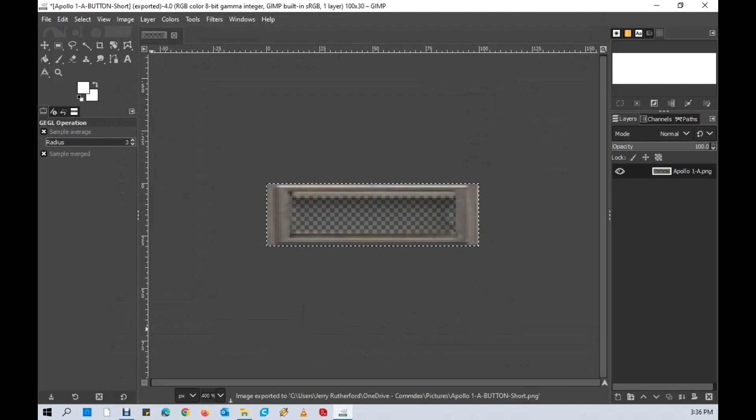So now I've opened up another program called Inkscape, another free program, very useful. Here's the button frame that I made, and here's a color approximation of what it looks like when it was turned off. So I take this and put it in this button like this.

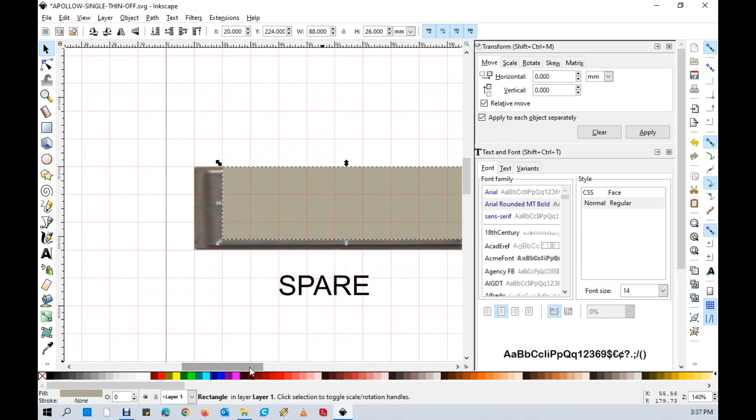I'll take this, and then use the align and distribute function, and tell it to center them both. Then I'm going to tell it to put this all the way in the back. Now we have a cool looking button.

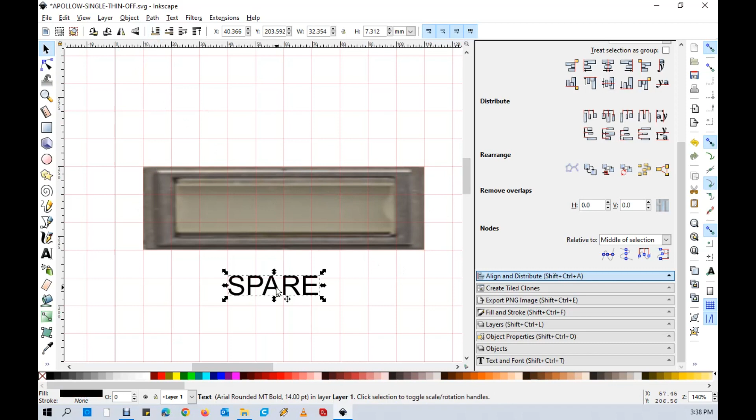Then I'm going to take this text and put it like this, and again use this alignment to center it. So now I've got a button, and that looks good, and I can save that button.

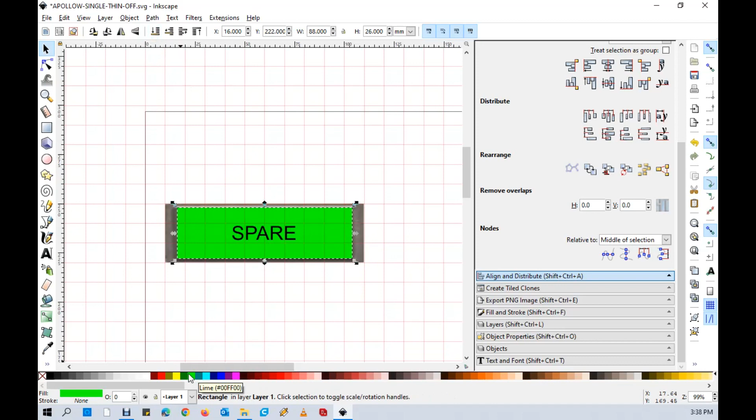One of the other things I can do is go back to this and assign it a different color, then throw it in the back. You can see I can make the buttons different colors. I'm going to do that for a bunch, and when I get done, I end up with a bunch of cool buttons like this.

What do we do with those, and what do those have to do with a CNC machine? Well, let me show you.

So let's go through the process of starting up the machine. First, we reset the e-stop switch to tell it it's safe to turn the machine on. Then we hit the activate or power switch to activate the Axis software so it's ready to run.

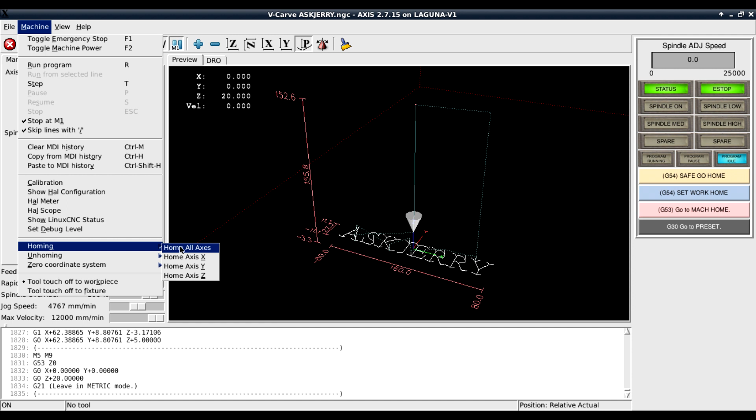Homing the machine is very important. This is where it travels to all of its different sensors, locates them, and knows its position. Then it marks that position as the zero point and references everything from there. It's very important.

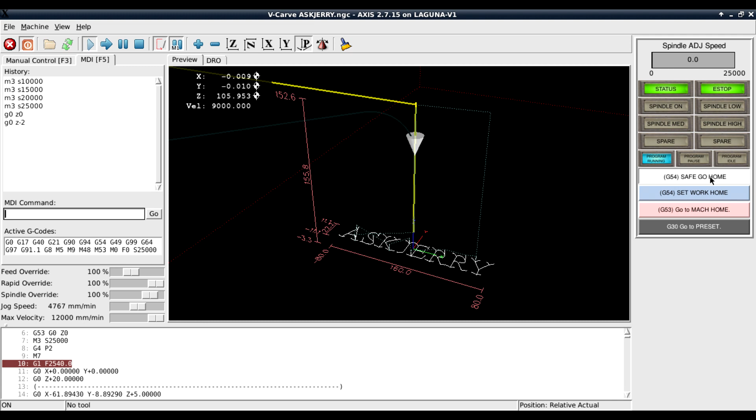The machine goes through a series of movements, and when it's finished, it knows where the 0 point is. From there, we can set our working position to be anywhere we need it to be. We define a new home point, and then at any time we can click the Safe Go Home button, and it'll automatically move the cutter as high as it'll go and then move over to that location.

You can see here that the tool is sitting in the middle right at the surface of the material, ready to start cutting. So now there's nothing left to do except hit the play button with the cycle start button, and the machine will start processing our job.

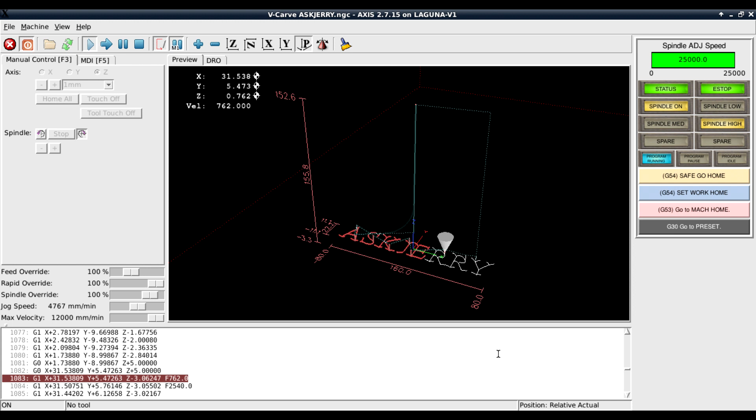There's a lot of action going on here. You see that the spindle is now turned on, running at the high speed of 25,000 RPM. And you can also see that it's halfway finished with the job. And then here it is, ended at the end of the job, shut down and ready for the next job. So let's see it in the real world.

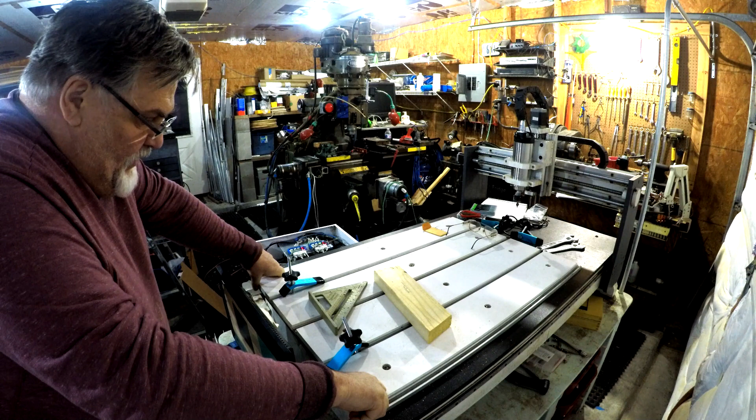Well, you reach a time when you've done as much testing as you can do, and it's time to give it a try and see what's going to happen.

So I got a little piece of scrap wood here. I'll set it up about evenly between the two of these like this. And then I'll take this and bring it over. Let me put this one on the other side, like this. There we go. Put that like that, and I'll bring this up to rest it on there. Yeah, that should hold that tight. Is it still level? No, wait. Alright, let's lock that down. That's good and tight. Now this side here, that's going to sit in that groove, and I don't want it to sit in the groove. Let's put that like that. Stick this under it. Okay.

I'm a little bit nervous here. I haven't tested this thing, and I don't know how well it's going to work. I hope it works. Okay, so let me load a file. Alright, I got a file in there.

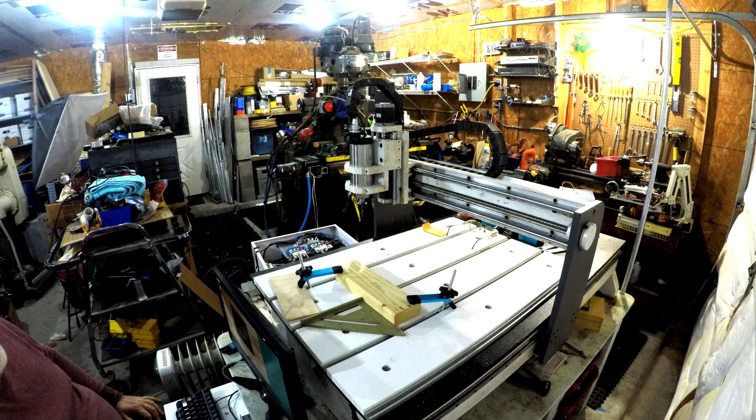Alright, we'll home the machine. So the Z and the X axis have homed. Now it's going to come in and do the Y axis. I could have it home faster than that, but I'm making sure everything's safe and I've got enough time to react if I have to hit the emergency off switch.

Alright, that looks good. So now I'm going to take this and push the Y axis back. And I'm going to bring the X axis over. About middle, that should be good I guess. Bring the Z-axis down.

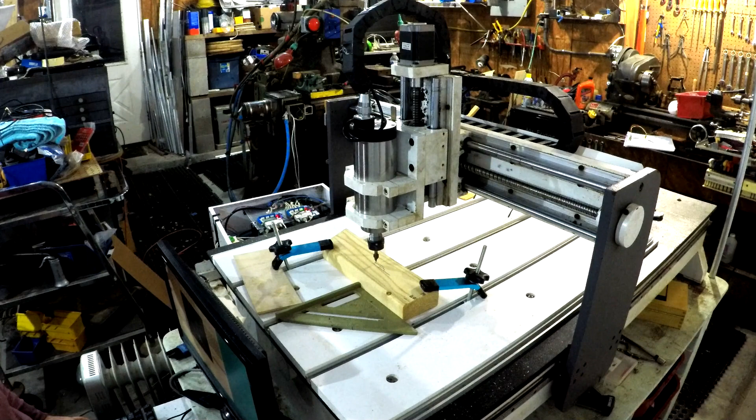Alright, so let's see, we'll go Y-axis, we'll take it back a little bit. That should be about the middle of the board. Now I'll set it to move in 1 millimeter increments.

28 degrees outside today. For you guys that use metric, that's -2 Celsius. Yeah, it's cold. So anyway, now what we do is we set this as the work home.

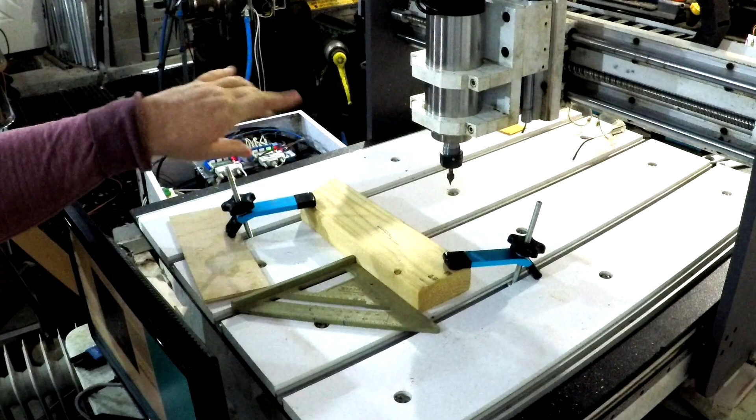And now that we've set that as the work home, no matter where this thing is, I can take the Z-axis for example, push it up here, and push the Y-axis over here out of the way. Before it starts cutting, it'll come into the home position and then go where it needs to go. In theory. So let's find out.

I'm going to tell it to run the job. Like I said, I'm a little bit nervous first time, but let's see what happens. Looks pretty good. I think I can lower the Z-axis though.

Well, that looks pretty good. So I'm going to tell it to safe go home. And I can put that Z down a little bit. So let me go to the Z-axis and tell it to go 2 millimeters down. Maybe a tad more. Nah, that's fine. And then I'm going to tell it that that's the new 0 point, and let's see what happens.

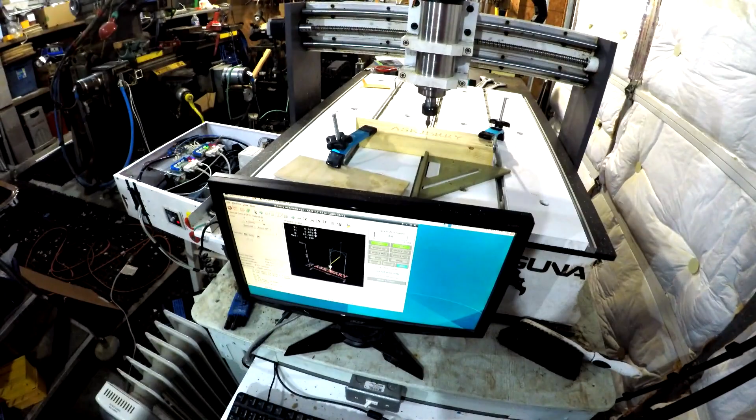And the setup that I have is I've got the LinuxCNC monitor here, and I've got a keyboard on the open drawer, which works out great. It's like having a desk. And then over here, it's still open, but I was just doing some final tweaking.

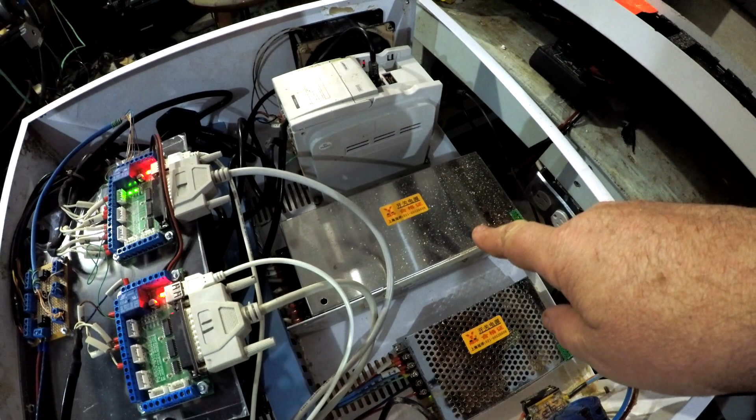So we've got a 24-volt supply for the sensors, the main supply for the stepper motors, that's the spindle controller. Then I've got 2 parallel ports, 1 and 2. This one takes care of all the step and direction, and it's got the limit switch inputs. And then over here, it's got the spindle right now, but I've got plenty of extra inputs and a few extra outputs to hook some other things up. Actually, these are inputs and these are outputs.

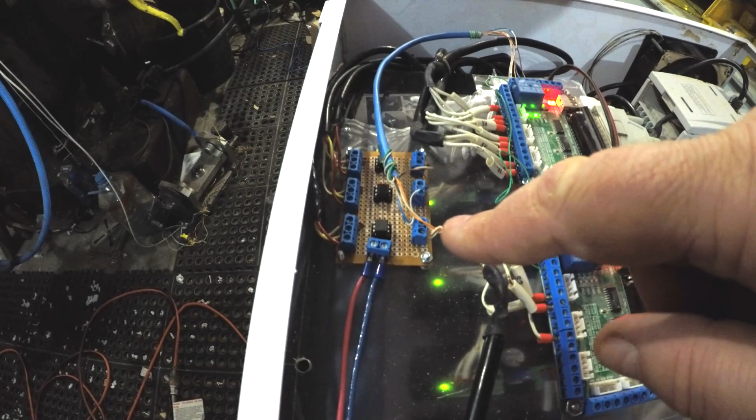And then this is the converter that I made, and it takes the 24-volt sensors and drops them down to 5 volts. And this little cable, I had just used cable like this, and I was getting glitches. I had to put something like this twisted pair to eliminate the glitches, and then tie the 2 boards, 5 volts and grounds together. And now it's behaving wonderfully. So there we go, it's cutting out parts. And I'm a happy camper.